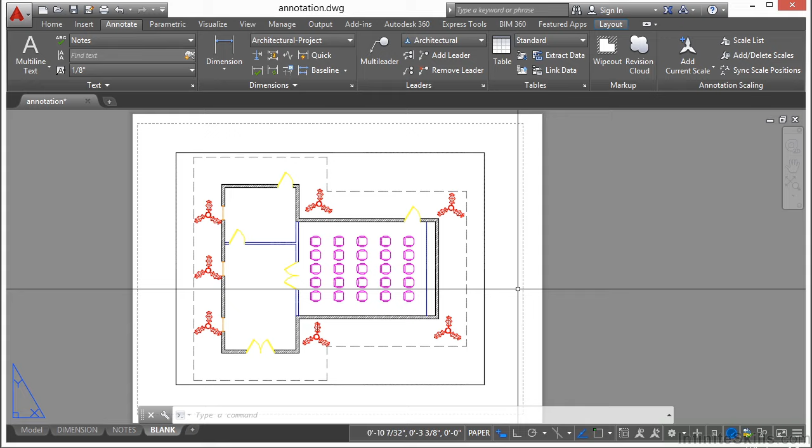Let's open up the annotation file for this chapter. In this file, you're going to see some examples of blocks, some of which we've used in other sections. Go to the Model tab. Here we have some blocks of some bushes or trees, some blocks of chairs, blocks of windows, and blocks of doors. Some of these are regular standard blocks, while others are what's called dynamic blocks.

Blocks are a group of objects combined to form one object. Each part is still intact and can be manipulated, but only while in the block editor. Otherwise, they act as one object. This allows custom shapes and designs to be made and to act as one object.

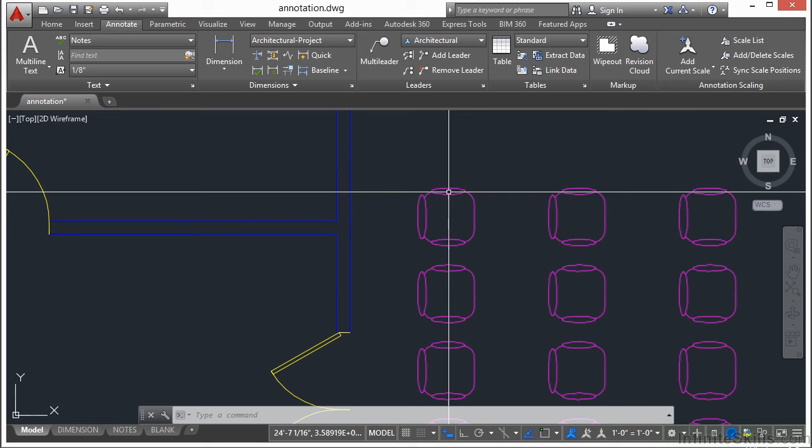If this chair wasn't a block, then we would have to grab every bit of line, object, ellipse, arc if we wanted to do anything to it. Now I can use the move command and I can move this chair very easily.

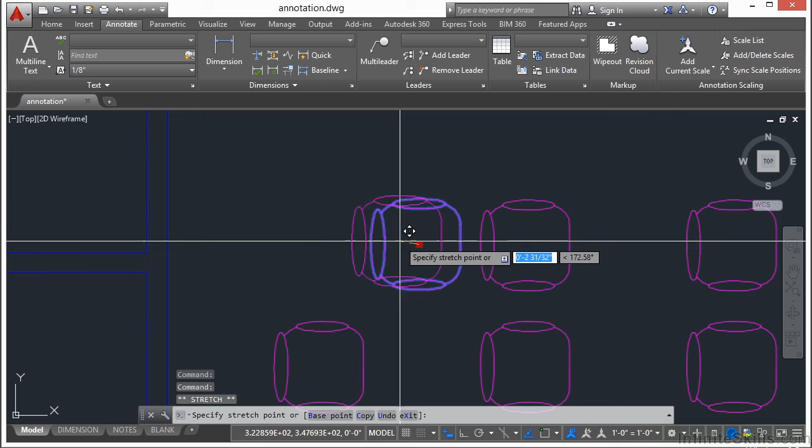Blocks can be made out of any AutoCAD object. This chair here is made up of arcs and ellipses and some lines. When I select it, it acts like one object, and all of them are on the layer that it was inserted on. Also, when selected, the block only has one grip, as you see here. That's the insertion grip, and I can move my block by that grip. Every block has an insertion point.

Now, the objects in a block can be created on any layer inside the block. If they are drawn on layer 0, then they will take on the properties of the layer that they were inserted on. Like this block here is on the chair layer, but the objects inside it are on layer 0. So keep that in mind. If objects are drawn on a specific layer inside a block, they will retain that layer's properties regardless of what layer the block is on. So keep this in mind when creating blocks. This is one of the reasons every drawing has a layer 0.

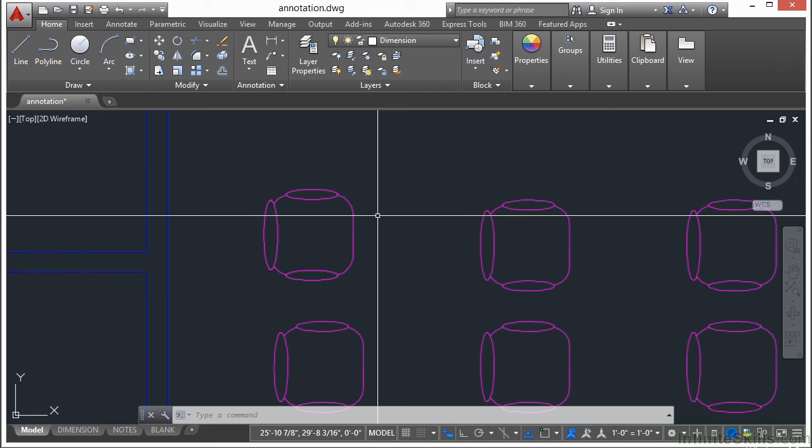Blocks are meant to recreate objects quickly, like the chairs and the doors that you see here. They can be copied, rotated, scaled, moved, erased, and more. They can be saved, inserted, and used again.

You can export them as their own file so that you could use them somewhere else with a W block command. And it's also a good practice to create a block library somewhere—a folder where you have all of your blocks saved in it. Organize it with subfolders so that you know what they are. Like make a subfolder of furniture, so all of your furniture can go there. Make it whatever it is that you need.

You can keep it there and organize it so that you can find them and use them in future drawings. If you make a block for a project that you're working on, it might be a good idea to save that block in your library, because if it was important enough to make for this one project, it might come up again and you might be able to use it.

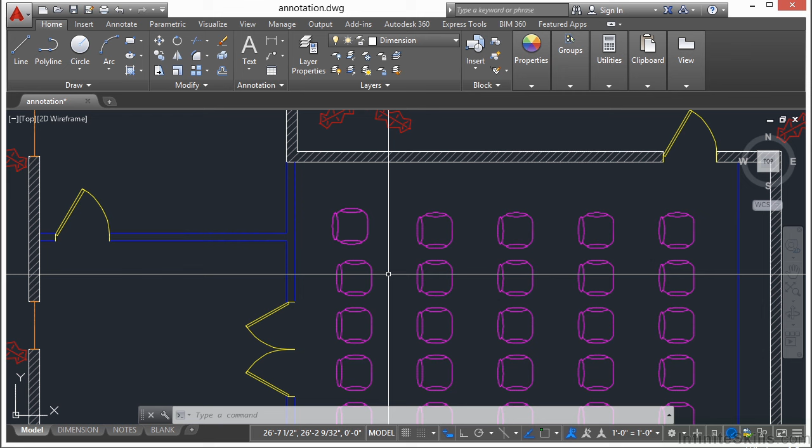Another common use for blocks are title blocks on drawings. A lot of companies will set up a block that is their title block. It makes it easy to control, to manipulate, and it keeps it on the drawing the way it should be and the same way all the time.